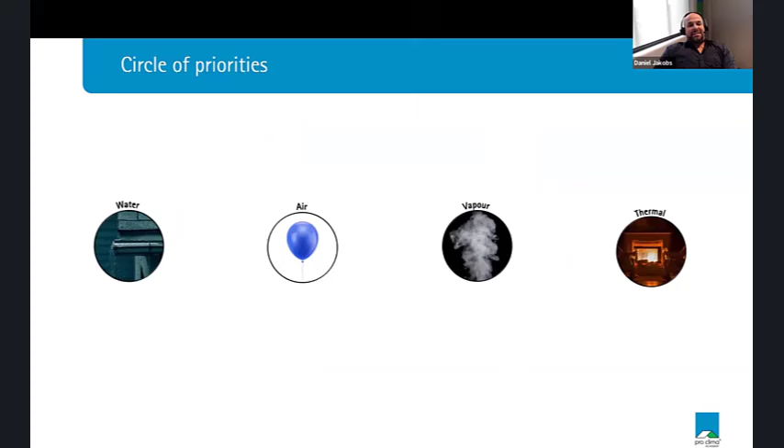And here's the reason why. If you ask me, what's with water? If you just look over the ditch to New Zealand, there's a nice book called The Rottenomics, and New Zealand still has to deal with massive problems of water leakage. So we know from New Zealand, and also in Australia, every time we have heavy rain, we have significant and massive water problems in our structures. That's why we have to deal with water first, because expensive parquetry and a nice kitchen are all worth nothing as long as our building is still leaking.

So that's why it's not acceptable. First of all, we have to get control of rain and water. Then we can talk about air.

But why do we talk about air first? Because I think energy efficiency is important. The building code is pushing for energy efficiency, and everyone is just, it's a big thing, isn't it? But we have to question what's actually generating energy efficiency, or why do we want it. We want to save energy, and we want to feel comfortable. But now we have to understand what makes us feel comfortable or uncomfortable.

I'm sitting here, behind me is a very drafty window. My hands are actually cold. I guess I'm used to it because I'm a chippy, but it's still uncomfortable. So what actually makes us feel uncomfortable, cold, is actually a draft on our skin, because the wind cools down the surface temperature of our skin.

So that makes us feel uncomfortable. So actually, the air draft makes us uncomfortable. And the best way to protect against it is to understand what's happening. Air movement is always energy loss.

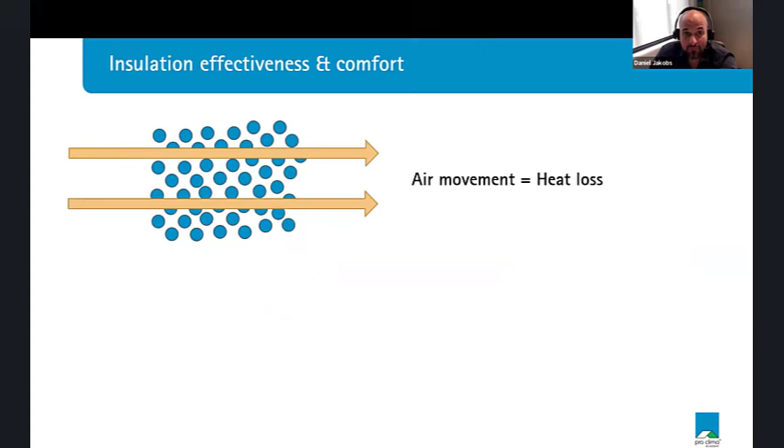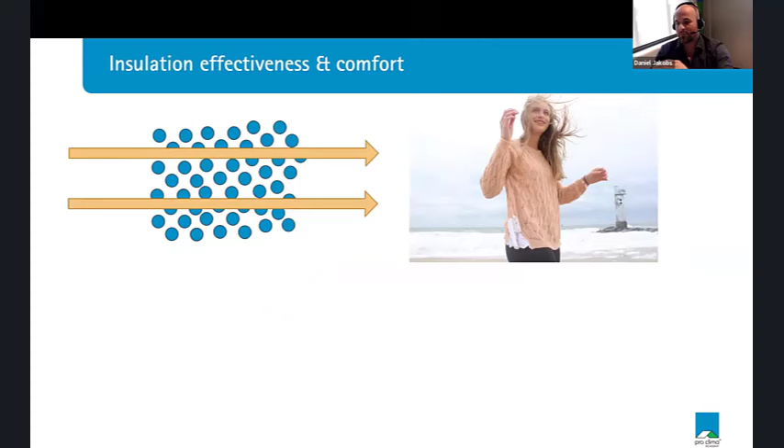Now let's compare it, if we wear a nice hand-woven jumper like this one, in the weather like we have today in Sydney, air will just get through the jumper and you're still going to feel cold. So that's why the only thing insulation actually does is trap air.

And the insulation manufacturers learned it at relatively early stages, because what they actually do is sell you 98% trapped air and 1 to 2% fibers. So it's actually smart to just sell you air and make money with it. But they understand that you have to trap air to actually have a good insulator.

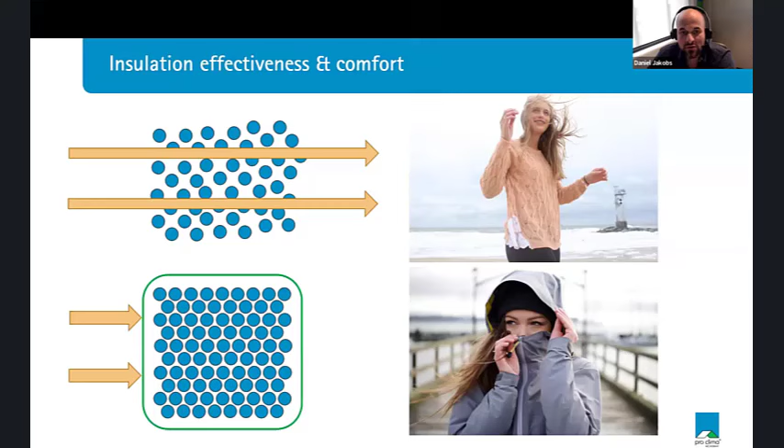So that's why we have to stop air movement in our structure. If you stop air movement, which we can measure with a blower door test, the tighter you build, the better it is. Stop air movement, then you stop removing heat to a certain amount. So roughly 70%, plus or minus, because there are studies around here in Australia, of energy efficiency is actually air tightness, not insulation.

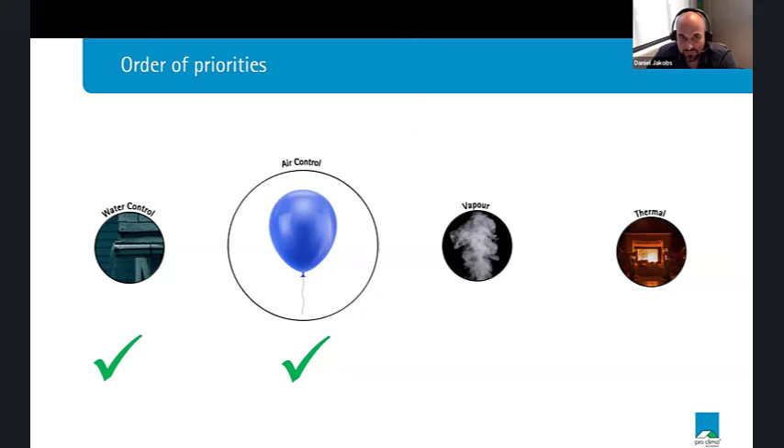So now we build airtight, but now we have a very important next topic, and this is about vapor. Because as we build airtight, we feel warm now, but we still produce moisture. We cook, we have a shower, we sweat. We produce moisture all the time, and it's free floating in the air. So what's happening with all the moisture?

As we know, as a family you produce around 200 liters a week of free floating moisture in the air. What's happening with all that? As we know, building airtight means it can't get away. Normally vapor always goes the way of least resistance. The first way was convection, and now that doesn't work anymore. So now it starts to try to travel through the structures, which is called diffusion. It means it starts to diffuse through the walls, in this case.

As plasterboard is highly vapor permeable, you can't consider that we have a lot of resistance in our structure. So it means we have to protect our structure from moisture traveling in with a smart vapor control layer, which we're going to talk about later. So now we trap the moisture inside, part two would be we need actually a ventilation concept.

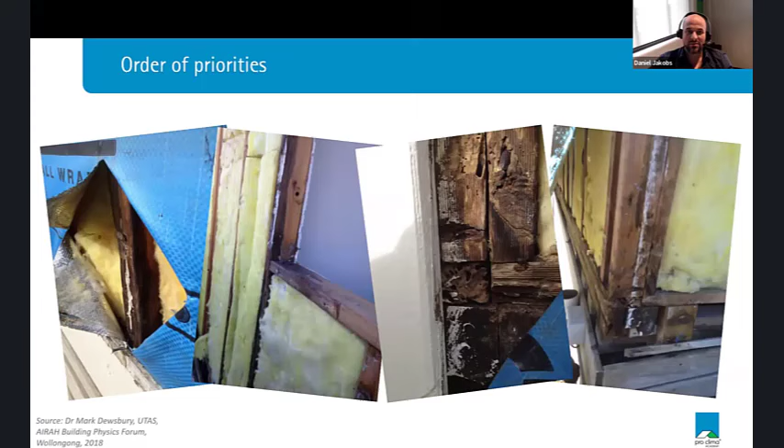The thing is, if you trap moisture - like here in Tassie, it's a pretty good picture - when we use good old aluminium foil, it's a perfect vapor barrier. Sitting in this case on the outside of the structure is a nightmare. This can happen after a few years. That's why you can't have vapor barriers on the outside of the structure, which we're going to talk about too.

Handling and understanding moisture means you have to understand different types of leaks. We have an energy leak, which in my opinion is most times when you have a thermal bridge. So if you have a steel structure or steel beams attached to the outside and the inside, you could create a cold surface on the inside. This is when you create something called a thermal bridge, pretty well known from the passive house movement. And you could have mold spots on your plasterboard on the inside.

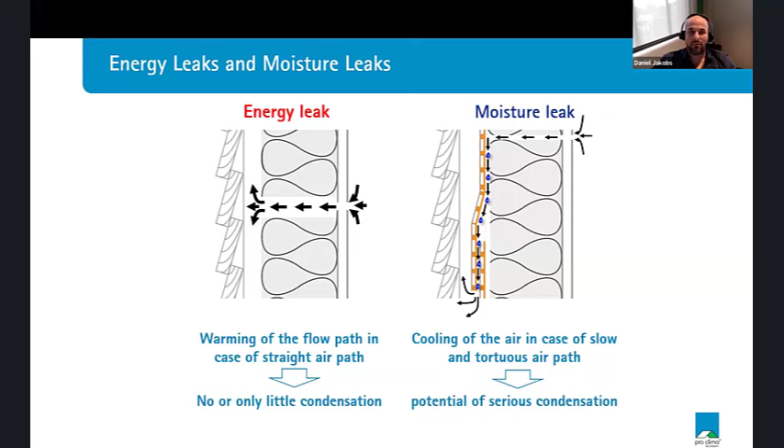A more tricky one is a moisture leak, which would actually be via convection again. It means you have a leak on one end, slowly the warm, moist air is traveling to the outside, and it will condensate on the way out. This would be a typical moisture leak because on some random spots you actually have mold, condensation, and rotten timbers. That's why I would always recommend understanding these two types.

So now I'd say we have a rough understanding of moisture too, and thermal. So what's happening with thermal now? And the answer is quite easy: if you actually control water, air, and vapor, thermal comes as a bonus. So now you can put in as much insulation as possible and you can't stuff up the system anymore. The reason I'm really so clear on it is because in most parts of the world, specifically Germany in the 1980s, 90s, we pushed on thermal.

There's a study, an Australia-based study on moisture management and condensation, which we're going to show you later on - they're actually focusing just on that one. It means we all had these problems because the more insulation you put in the structure, the higher the temperature difference between the inside and outside, the higher the moisture drive, and the higher the potential damage to your structure. That's why we have to get water, air, and vapor right first, and then we can have thermal as a positive side effect.

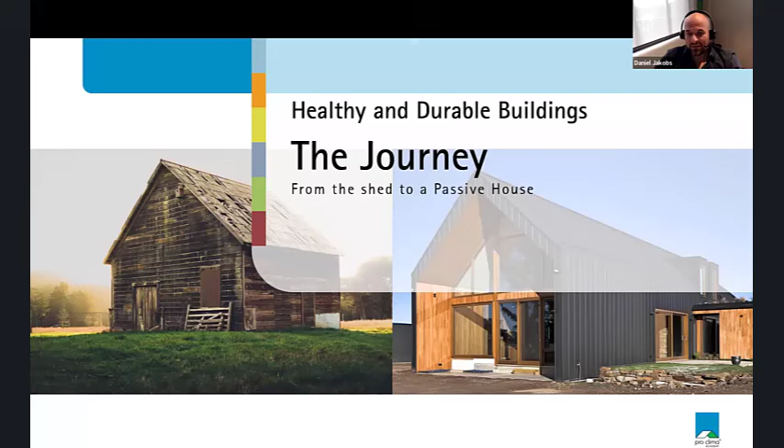We want to live somewhere like here on the right, which is a passive house - at the moment the highest building standard internationally we have so far. So let's get on the way. First of all, we have to leave the past behind.

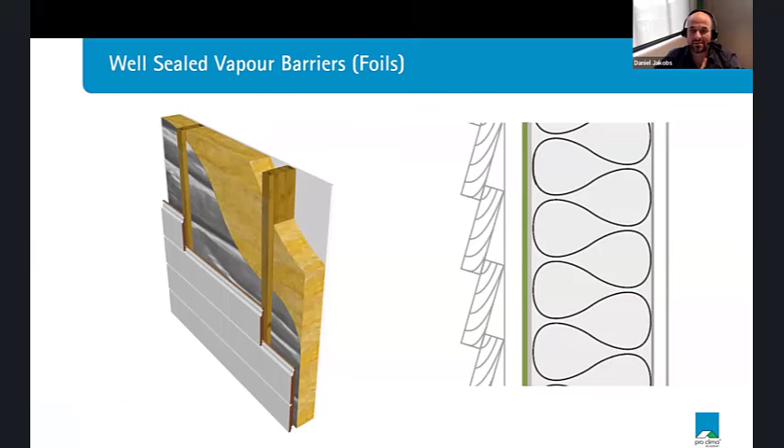This is the good old aluminium foil. We still see heaps on building sites, which, by the way, in most of the climate zones in Melbourne and Sydney is actually illegal because aluminium foil is a perfect vapor blocker. What it does is you have internal moisture traveling through your structure to the outside, and it's going to hit the cold surface of the aluminium foil - you get condensation. Why? A good example: if you wrap your fish on the barbie in aluminium foil, it keeps the moisture in, isn't it?

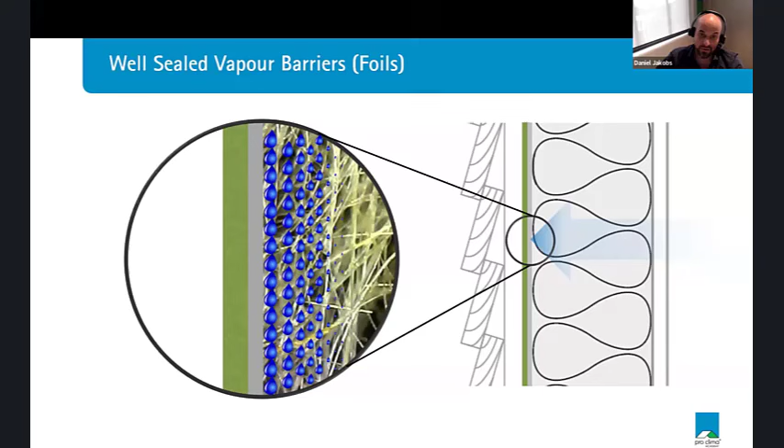So that's what you want - that's the purpose of an aluminium foil. If you do the same to your house, you actually wrap the moisture in your house - you keep it in, so you don't have any drying potential. That's why the building code says in climate zones 4 to 8 now, you have to use a class 4 vapor permeable membrane on the outside. Perfect - what you see here: class 4, cladding on top.

That's, by the way, code compliance at the moment. And you already can hear my sarcasm.

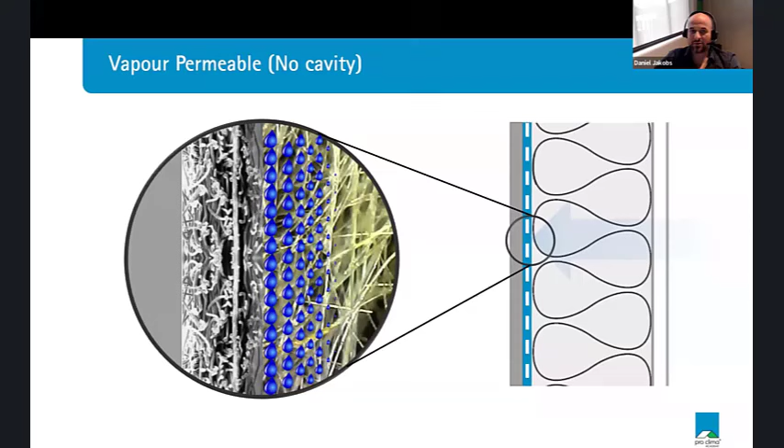You still have condensation because it doesn't help you if you have something not vapor permeable on top of something vapor permeable. You still trap moisture. Still the same issue. The quick answer here is you just separate the two layers.

So now you actually have internal moisture traveling through, which is a typical cold climate condition. It's traveling from the inside to the outside. As you separate these two layers, now your structure is actually allowed to dry. Now the moisture can escape and you can ventilate it out. And if you have condensation, because you might hit a metal cladding, now it can drain down. So we call this a drained and ventilated facade system.

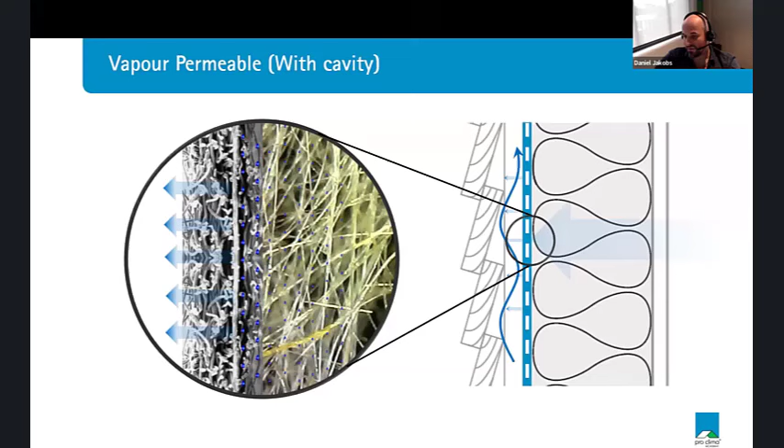There's still a risk because if you introduce too much moisture in a structure in certain climates, you still might have the problem that your structure can't dry out fast enough. So you still need a smart vapor control layer on the inside to stop moisture getting in your structure. But you still, if you have moisture in your structure, you have the maximum drying potential to the outside.

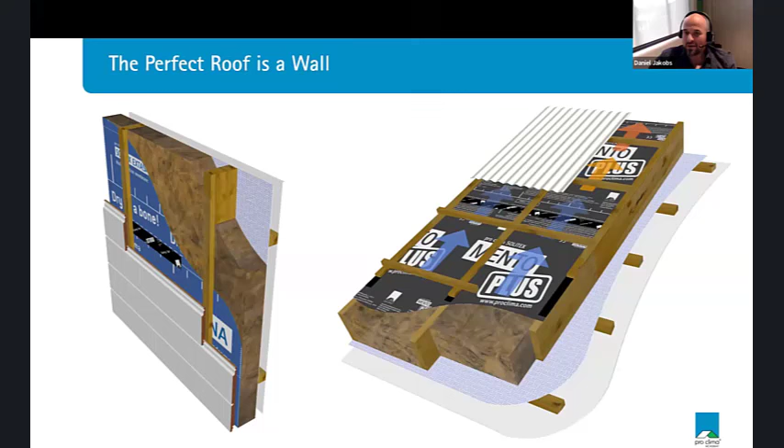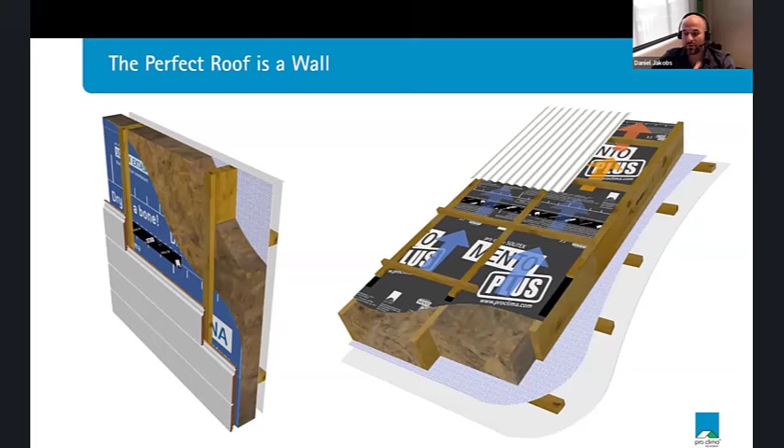Another positive side effect: because you created a ventilation layer on your roof, and don't use these anti-con blankets, you actually create a chimney effect also. So as you create an airflow in your roof structure, you remove heat in summer, which has a pretty good effect in both directions.

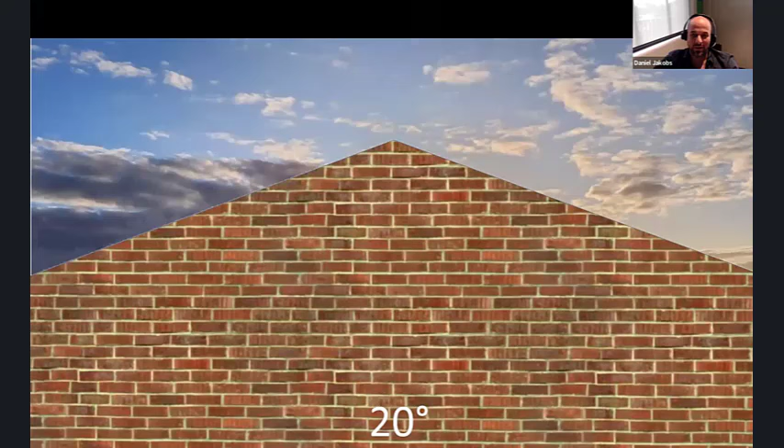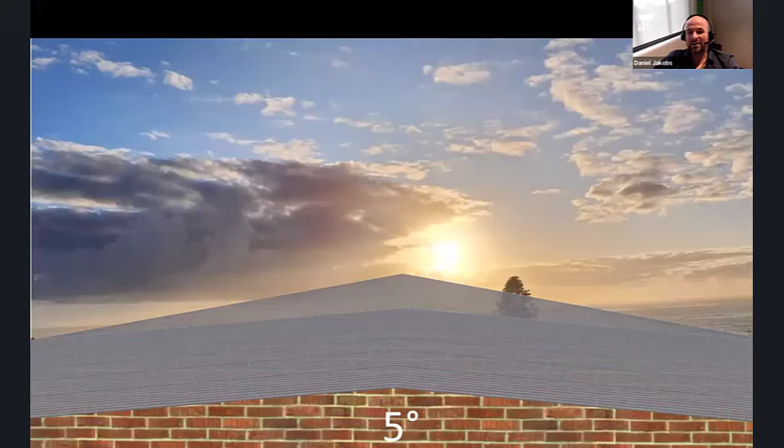So now the big gambling and negotiation will start. We try to fight for each single degree on your roof because you want to get it down. And now it makes sense why we actually want to go down to 2 degrees, because at least you have something left from the ocean view, isn't it? So there's a reason, because we have height restrictions, specifically when we live in dense areas, not outside of big cities, and we want to have the views.

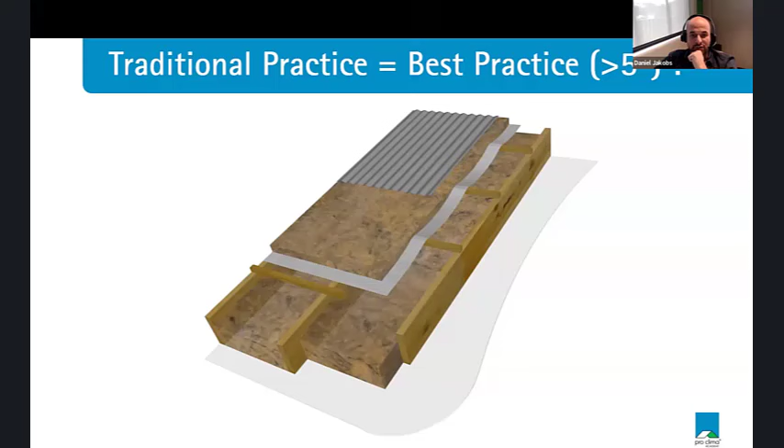So what's the difference here? If you go back to the building physics perspective, that's best practice in a traditional way: you just put the anti-con over and hope for the best, with a ventilation layer below. We specifically at pro clima are pretty precise with our recommendations.

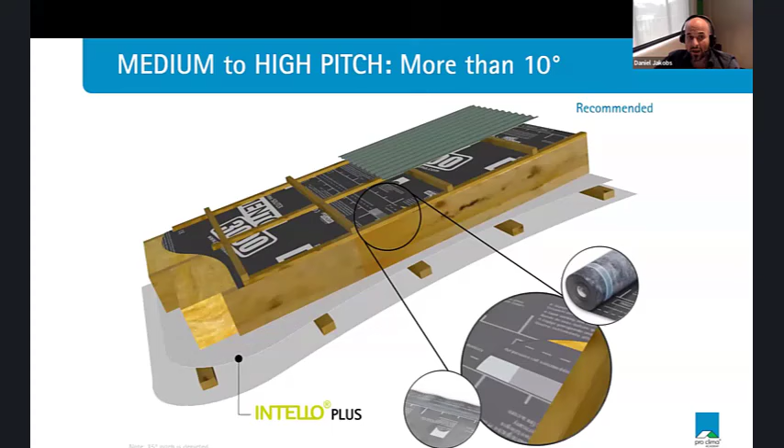So we say, if you're above 10 degrees, you can use flexible membranes right over the rafters, unsupported. If you're 5 to 10 degrees, then you should always use a board, because the biggest issue is membranes always sag a little bit. So you can have ponding water on your roof. You all agree having a pool on the roof is not a great idea. We always want to avoid it at all costs. So that's why you put a board on, put the membrane on top to stop sagging of the membrane.

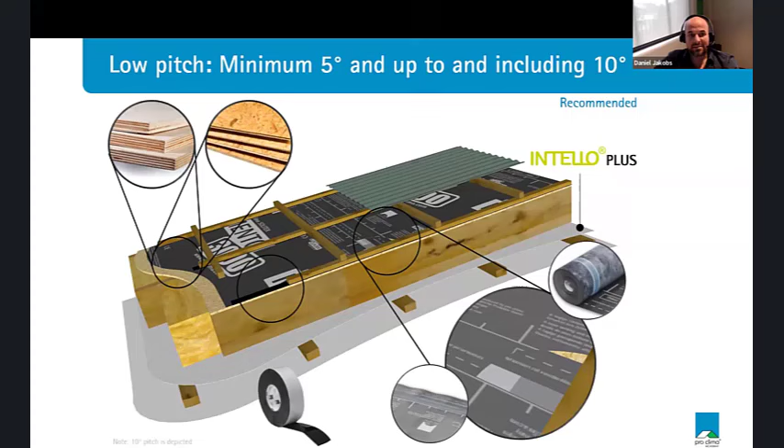And using certain accessory products like the nail penetration tape, and maybe a membrane with an integrated tape, which performs significantly better than other membranes, is definitely a big recommendation here. If you're above 10 degrees, same again—I don't even know why I have this slide in, because it's a double up. Sorry for that.

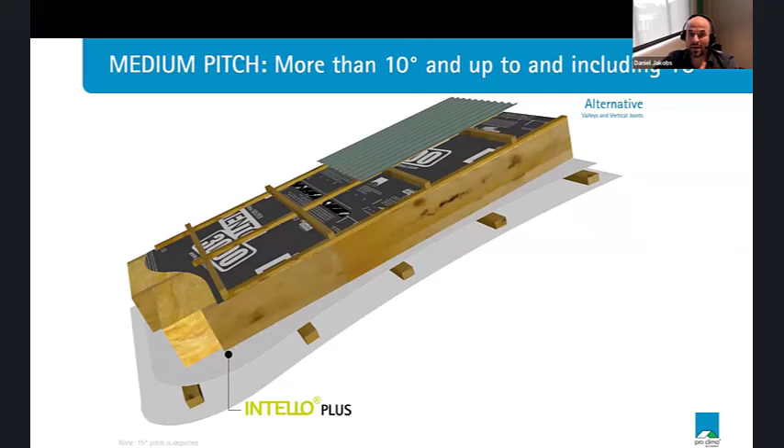We want to understand where we're actually coming from. Having the anti-con system or roof blankets on 2 degree pitch is still code compliant, which is a big issue, because you get a water pool, and as you see here, you don't have a drainage layer.

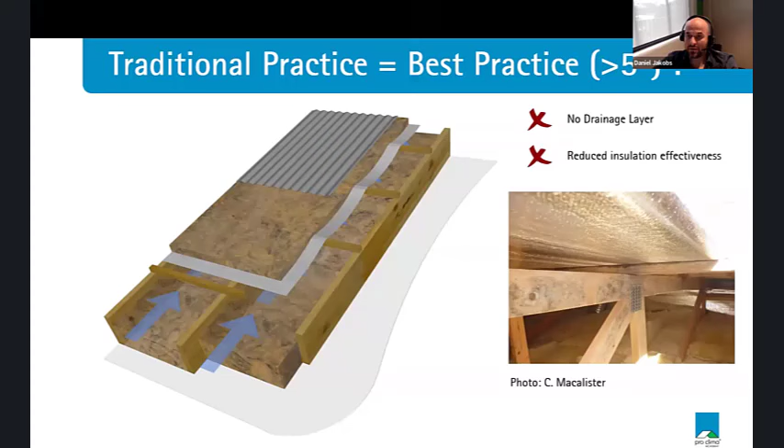As you can see here on the right picture from Tasmania, you can trap a lot of moisture even if you ventilate it, because you still create a cold surface on the inside of your roof structure. That's a good reason why in Tassie you barely see any aluminium foils, even if it's still legal. So let's retrofit or deconstruct the structure.

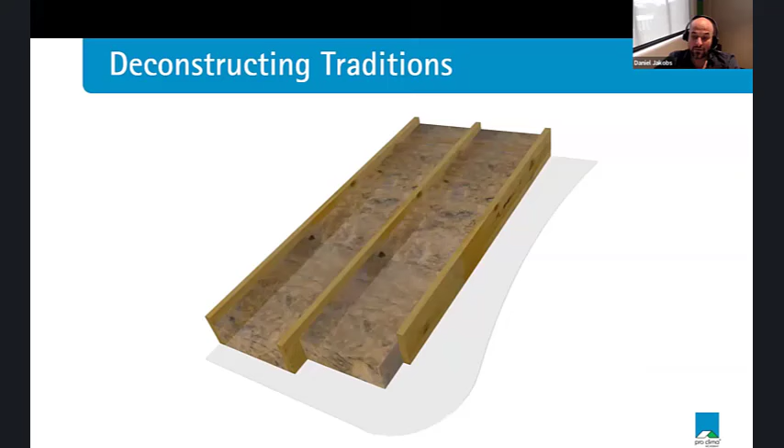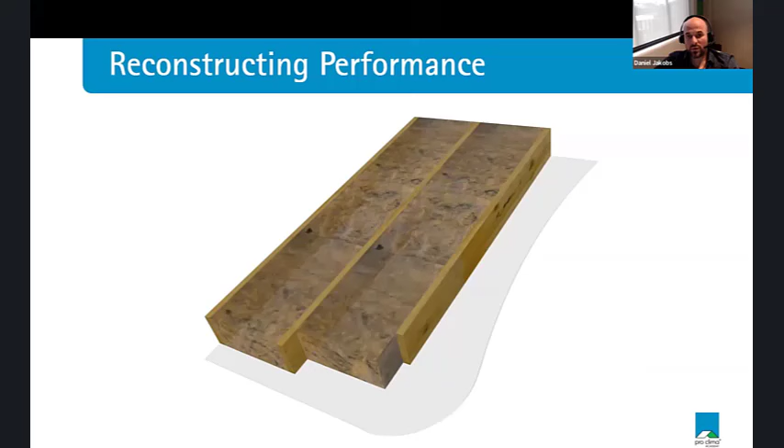We just remove layer by layer. The first thing we do is fill up the rafters completely with insulation, because you don't want an insulation gap, since you get wind washing, which we'll talk about in a second. You directly attach the membrane and tape the overlaps, because you don't want any wind getting into your insulation.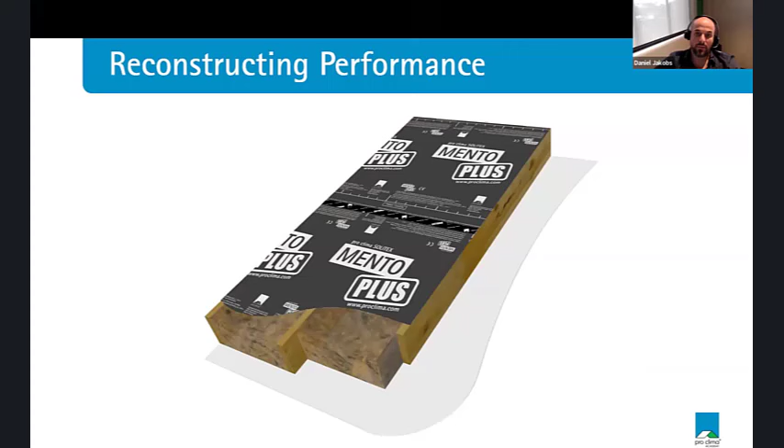That reduces the performance of your insulation. You put counterbattens on, in the best case with a Naideck tape, which is kind of a nail penetration tape, then for low roof pitch, purlins and roof cladding go on, and it's easy going.

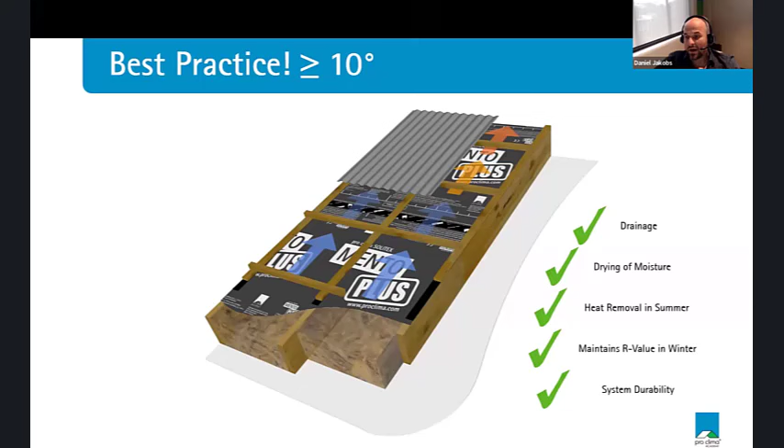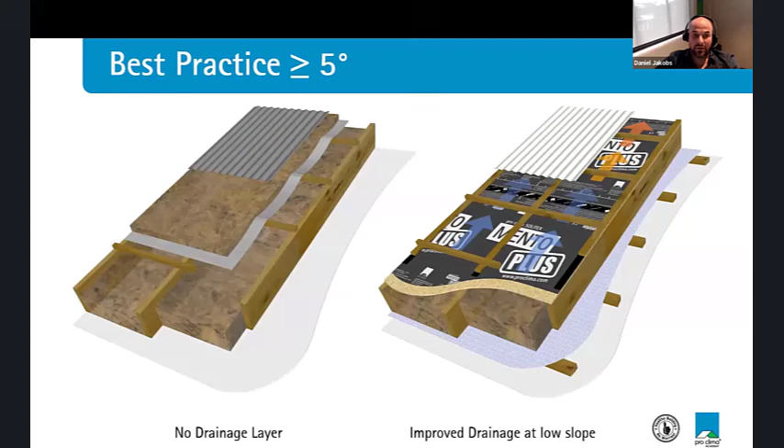As I said, you remove moisture in winter and heat in summer. So now you can tick all the boxes for summer and winter conditions, because you have the perfect roof cassette. If you have no drainage layer properly on the left side, you will trap moisture, which definitely reduces the performance of your structure over a long period of time.

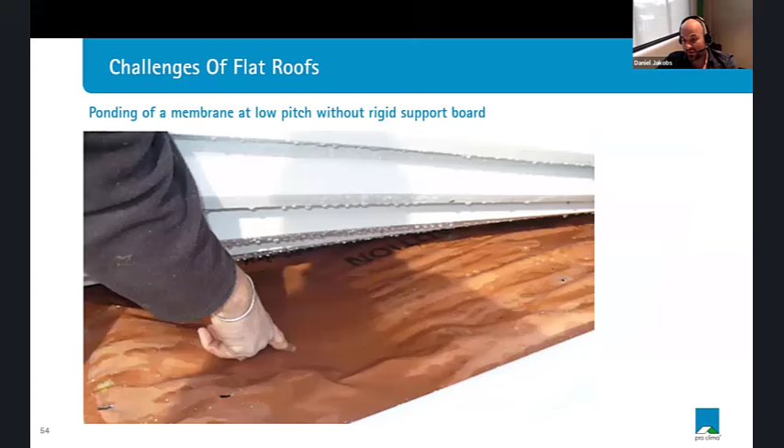But what are the challenges? The reason for issues with flat roofs is actually ponding. Whenever you install membranes on low pitch roofs, you can install it as perfect as you want. I consider myself a pretty half decent chippy, and I've worked with these membranes for quite a while, so my installations are pretty neat. Even with a perfect install like here, membranes will always sag a little bit because they relax under heat, which is quite normal, which is actually a good thing.

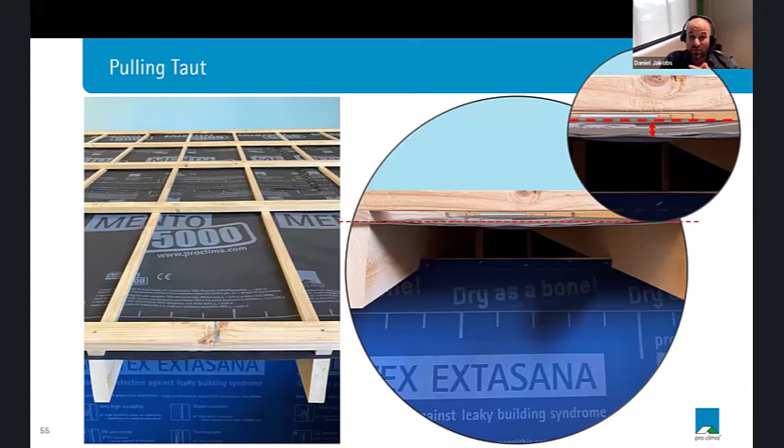If membranes would actually tighten up under heat, you'd create a lot of stress on the tapes and on the fixings. So this sagging is what you want.

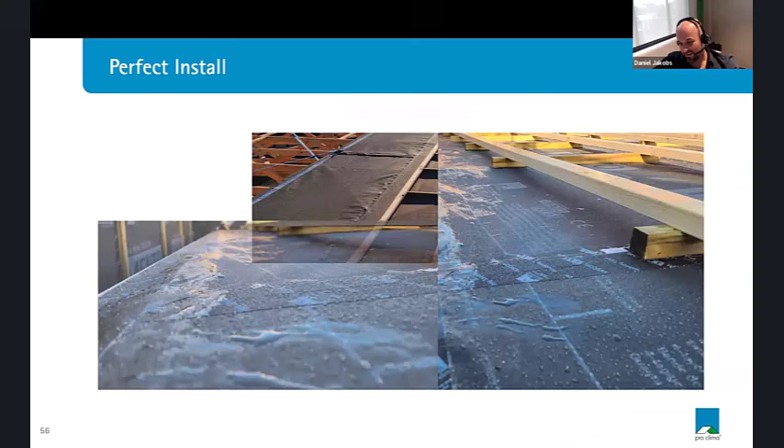Even this building site is a perfect install. You see it's nice and taut, it's shiny, it's just beautiful, but it's 1.5 degree roof pitch. So it looks great, and you might be confident it won't leak. Then just the day after, that's exactly the same roof under 1.5 degree roof pitch.

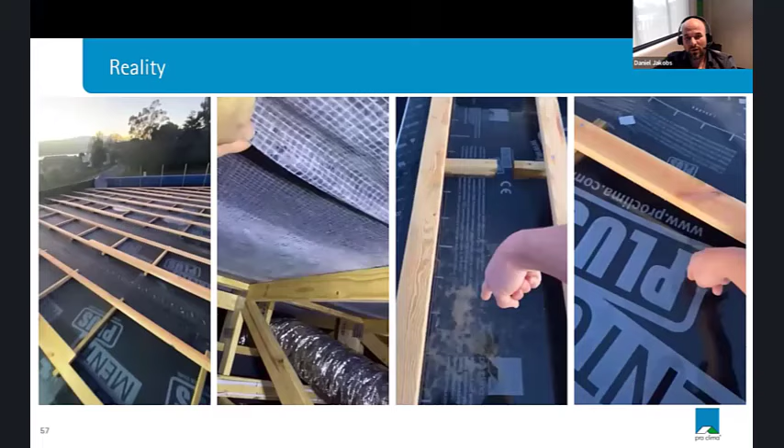So even the best products on the market won't help you. You still have water pools on the roof, water wicking through the fleece via capillary action. We all agree that's not a good outcome. This can actually happen just based on condensation underneath your roof too. So we all agree it's not how it works, or what we would sign off on.

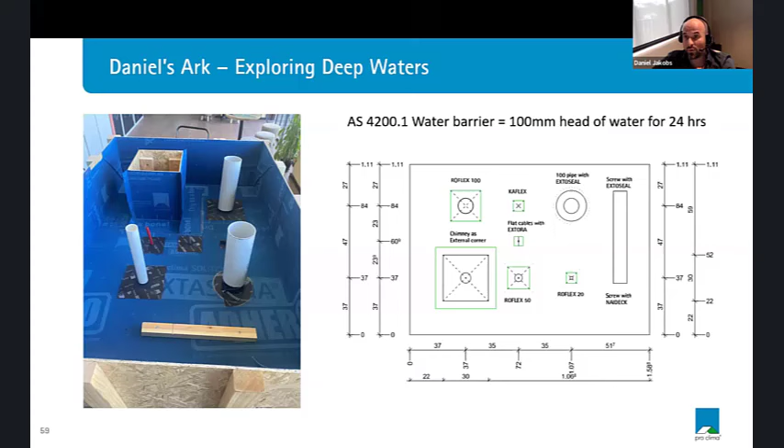Before figuring out where the problems are, I really wanted to understand them. To be code compliant for membranes, you have to hold 100 millimeters of water for 24 hours, which equals 1 kilopascal. To be honest, when I was building this box back during COVID, I was pretty confident.

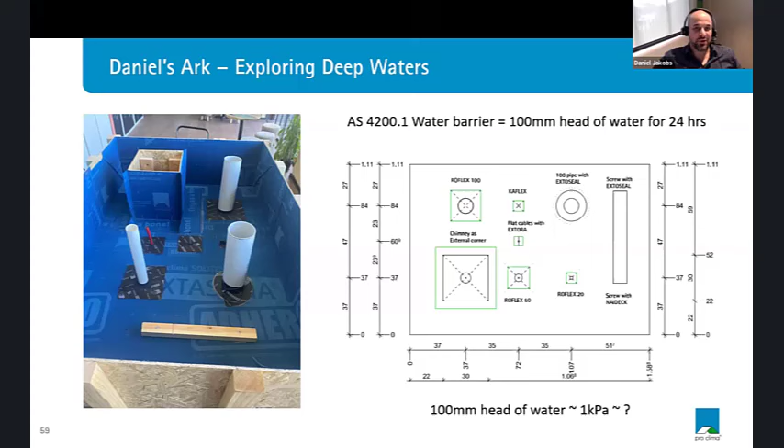I thought, easy, I know exactly what's happening and I know it all, I'm smart, and I just started it. I came up with all sorts of funky ideas, some pretty basic, and it was leaking. So there was a first kickback, and actually I wasn't as smart as I thought.

So I had to change my detail, and I used a specific stretchy tape to actually seal it around. Then for the chimney, I already came up with a super fancy origami taping technique for how to tape around chimneys, because I wanted to avoid other products. And I thought, oh, it must work for sure.

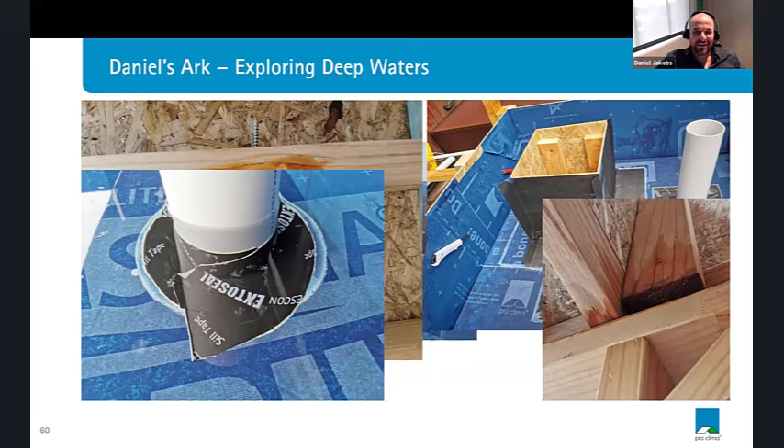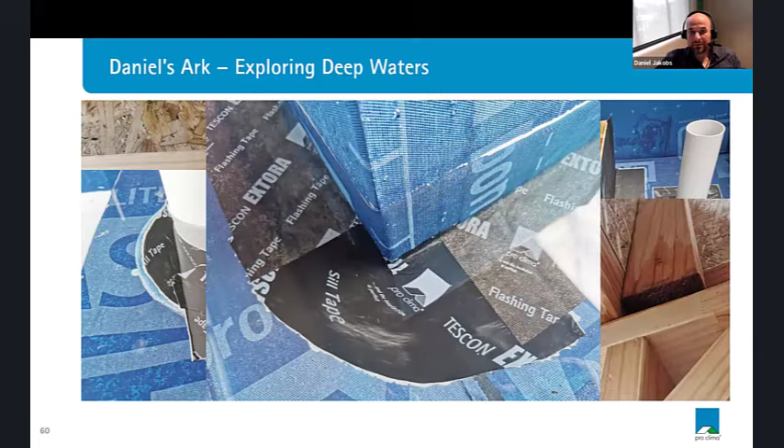And 3 or 4 corners leak too. So another big learning for me, I had to change it again. I went back to a stretchy tape because I realized having the right products for the right applications in the end is faster and cheaper. And this is how it went all the way through, and this is how I came up with the flat Adhero system.

We're pretty precise how things are working, and as always, we have to think of it as a system. It doesn't matter if you talk about our pro clima products or other competitor products, we always think about systems, not products. It's very important, and also important to understand how a structure is working.

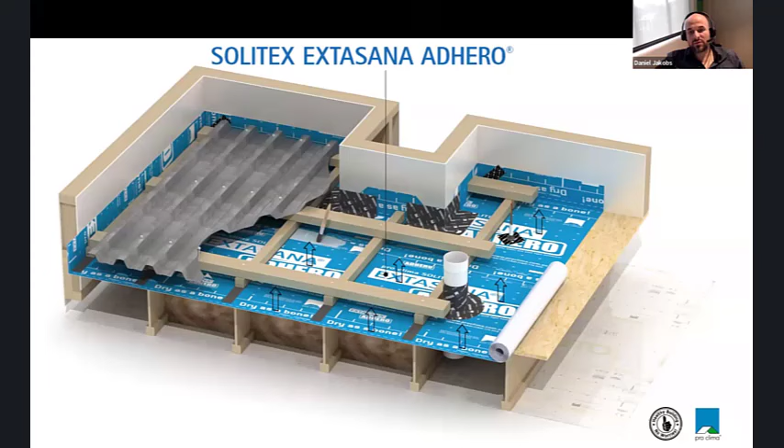So it means the roof structure, we always try to create the highest drying potential for this roof structure. That's why you always recommend having a smart vapor controller on the inside to stop internal moisture getting into our structure, and we want to have the highest drying potential to the outside too. We also have to understand that building materials are never 100% dry.

My experience here in Australia is quite often the opposite. Sometimes it feels like we're trying to introduce as much moisture into the structure before we cover it up with membranes. So the important part is we have to keep our structure dry over the whole period of time.

When you have a standing seam, it's kind of a tricky one. In this buildup, you really always have to have a separation layer. You can't have standing seam directly on the membrane, because otherwise you have a cold surface hard against the membrane, and you'll pretty surely end up with a soggy board. That's why this separation mesh, even if it's just 8 millimeters, allows a drainage layer for the standing seam or flat metal roof.

Very important to say, this is not a ventilation layer. This is just a pure drainage layer and separation layer. And this system has to work with a smart vapor control layer only, because there's nothing else which can actually make it work.

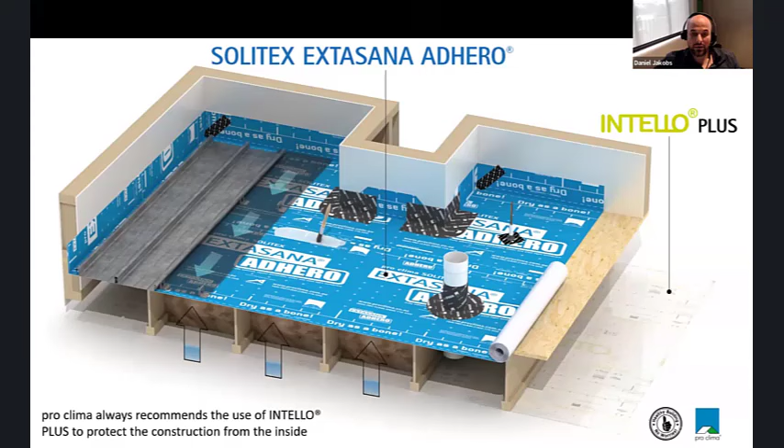Also, as this will never be a deemed-to-satisfy solution, you have to do WUFI calcs, and the color of the roof will matter. In quite a few climates and orientations, you actually have to go with a dark colored roof, because I know the market is driving towards white colored roofs, since we don't want overheating of our roof structure.

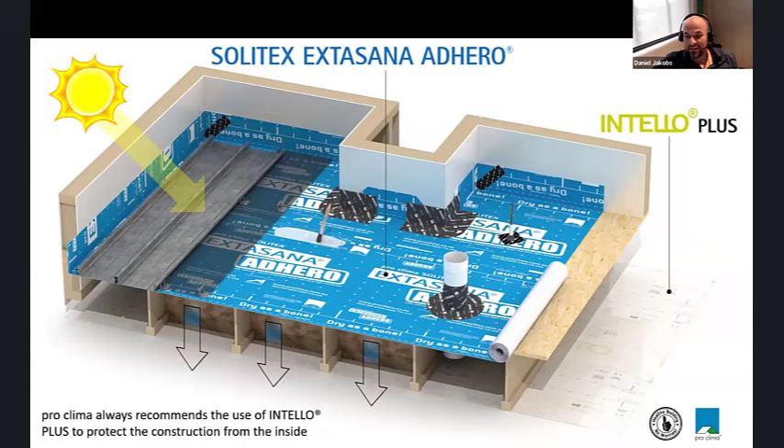But if you have a white colored roof, you might not have enough energy to allow your moisture to drive back, because in summer, when sun hits the roof sheets, it actually creates a reverse moisture drive. Now your structure can dry out to the inside, because we have this magic smart vapor control layer in here. Same with materials, they can also dry out to the inside.

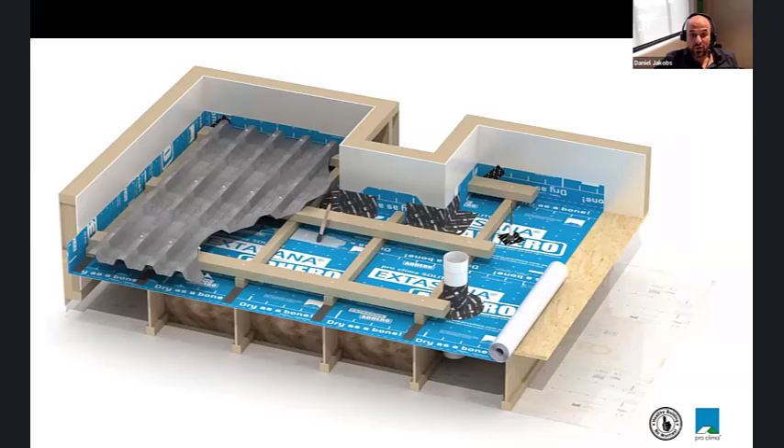Very important is, the better case is always if you can separate your roof sheeting from the membrane, as you can see here, and create a proper drained and ventilated roof structure. The thing is, as we have a very, very low roof pitch, we have something like a stagnant effect, so we don't have a proper ventilation layer anymore.

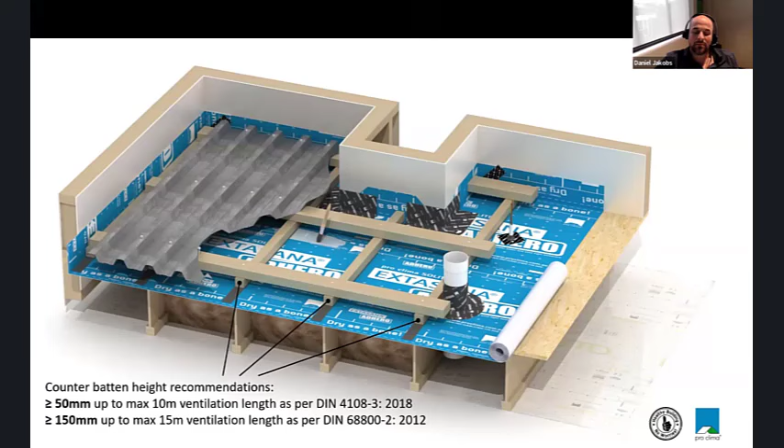And that's why the ventilation height needs to get more and more. So we say, if the roof is up to 10 meters, you should have a minimum 50 millimeter ventilation layer. If the roof is longer than 10 meters, you should actually have 150 millimeters of ventilation. I know no one will do it, but it's very important to mention, because international studies from Germany, from Lund University, from the US show that ventilation is very important to actually get rid of moisture. These are based on the German standards. I know it will take a while before we implement them, but I think it's very important to understand the risk of moisture in our roof cavity.

We have quite a few technical articles regarding this topic, called Above Sheathing Ventilation. You can download all the technical articles on the pro clima website.

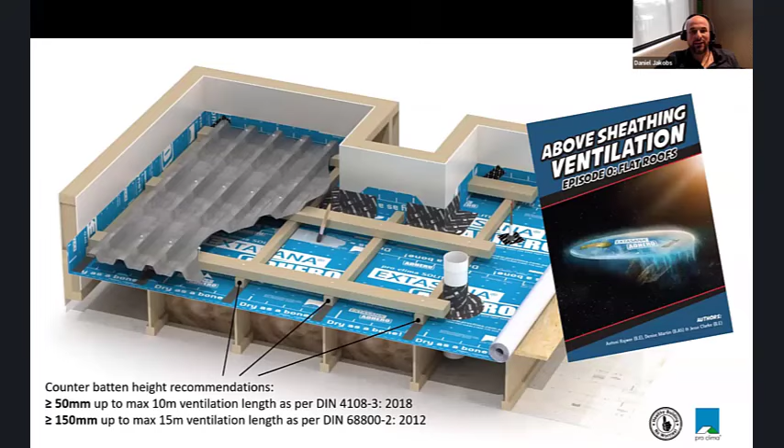It's nice to talk about all the theory and have nice thoughts. And when I got you right, I think we have quite a few architects here today, isn't it? So what's our biggest concern?

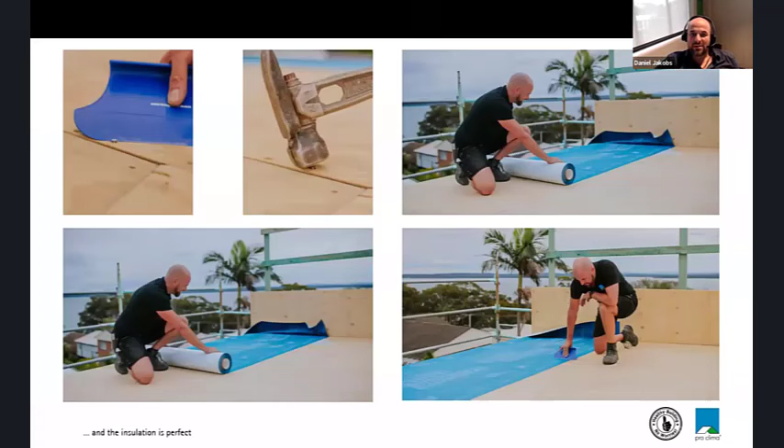A little one, you see the nail is sticking out, you have to hammer the nail in, because if you have the nail sticking out and you walk over it, you're going to pierce the membrane and have a leak again. So you spend a bit more money to have a better system, but it won't work anymore.

Install it properly, nice and taut, don't have any wrinkles, because if you have wrinkles and overlap, you can channel water back again. Using the primer here to stop capillary action is something I came up with, because you really want to stop water slowly moving upwards against gravity, thanks to wind pressure.

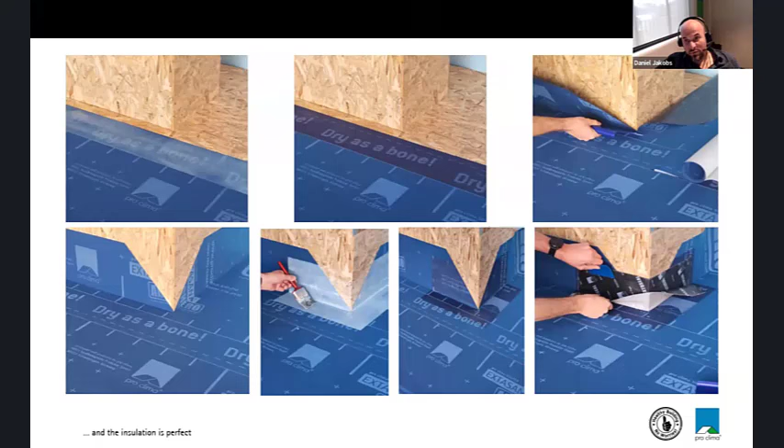Corners and details and bits and pieces. It's very important to use the primer again. You nicely fold it into the corners, prime the overlaps, and use the stretchy tape around the corners, because this actually really brings a pretty perfect outcome.

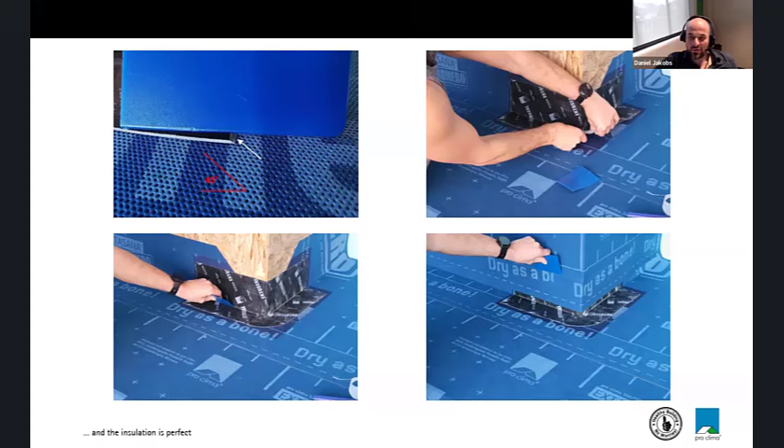The idea is why I'm so precise, because if you just follow the steps, it's going to always work based on my experience. So whoever is installing it, if you follow these steps, it's a pretty safe system to use.

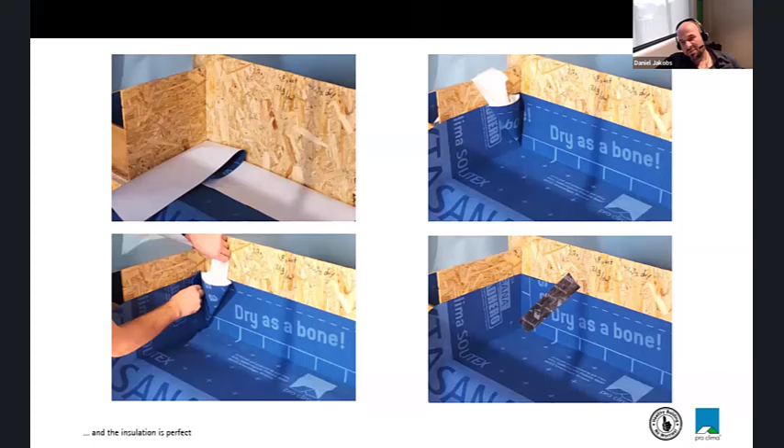The same was true with internal corners. I actually prefer not to tape internal corners. Watch some Japanese origami videos, and then you see you can just fold it inside and it looks quite perfect, because I didn't cut on the internal corner, as you can see here. Every time when you cut, you introduce another risk, and this is what we're trying to avoid here.

Same with pipe penetrations, you just prime around, use the stretchy tape, and work yourself all the way around the pipe. It's pretty easy. It looks more complicated than it is. So it was actually a pretty easy detail.

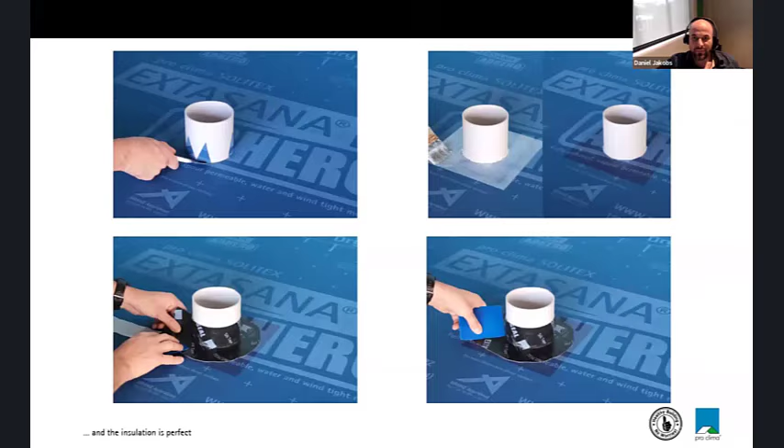Also with cables, cables are tricky because in Australia we have flat cables, while most of the world has round cables. Round cables, we have grommets and they seal really, really well. With flat cables in this case, it's always difficult. I have some taping techniques for how you can tape it, but as you can see, there are little corrugations, and it's nearly impossible to push the cable properly into the corrugations.

So I use a conduit or pipe offcuts with a grommet, because we know the grommets seal really, really well. Run the pipe through, run the cable through, and at the end, when you finish, just seal it up. And then it's a perfect seal. Also, in my opinion, we shouldn't run cables while we run membranes and try to seal the structure, so it's actually much easier because you just do it afterwards.

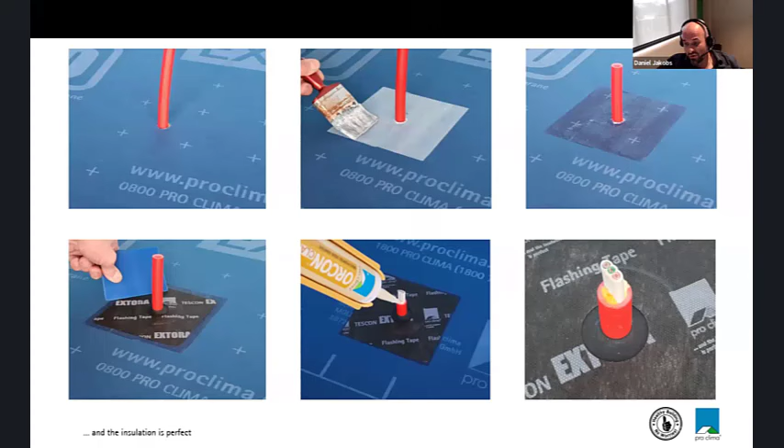Would you agree? I would say yes, specifically with data cables, because if you break like a 50-meter data cable because they just wanted to run it in the beginning, it's a pretty expensive exercise.

And we talked about the roof pitches before, so whatever is below 10 degrees, you can have water wicking through the screw penetration. We know this is happening because I've seen it in Australia, and it's been a code requirement in Germany for around 15 years for all roof pitches. In Australia we just say below 10 degrees. That's why you have to use something like a butyl tape, a nail penetration sealant tape.

So what you do is put it underneath the screw, because there's so much glue and it's so sticky that when you drill through the glue, the screw pulls the glue into the hole and seals it from the inside. It works really, really well, and it's well established on the commercial market already.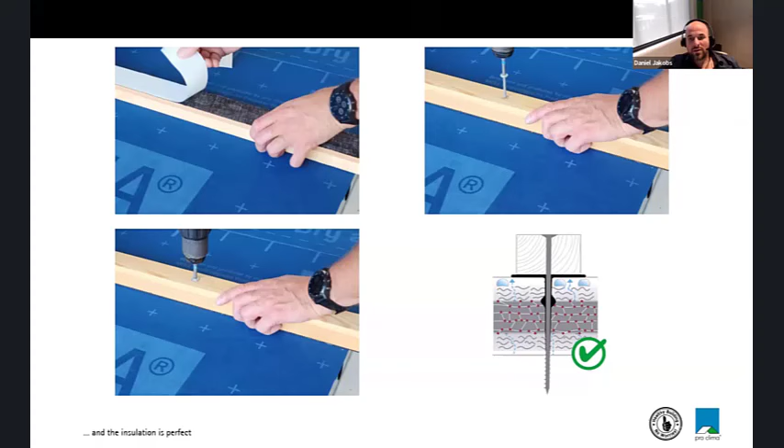Last but not least, most likely the only way you can make this system work is with a smart vapor control layer on the inside, like our Intello here. So as we said, the smart vapor control layer, and of course now I'll talk specifically about our product, is relatively new on the Australian market. We're of course not the only one selling these kinds of products, even knowing the differences in the products, but that's not part of the topic today.

So why are we using the Intello smart vapor control layer? I always say treat your wall like a fancy exclusive club, like the Berghain Club here in Berlin.

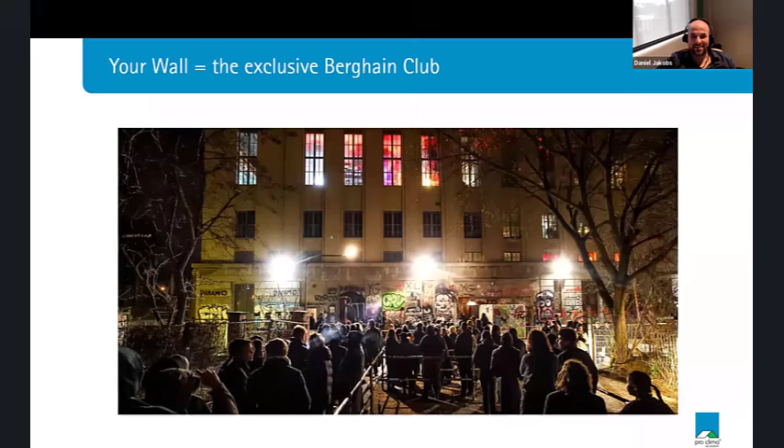I'm pretty sure everyone heard about the Berghain, and everyone wants to go there because it's the world's most famous club. We all know that this club has the hardest bouncer in the world, and it's actually quite difficult to get in. That's exactly what our smart vapor controller is doing in Intello.

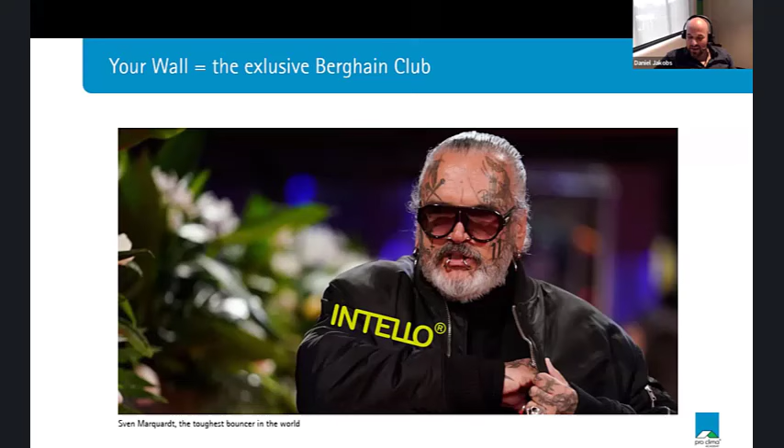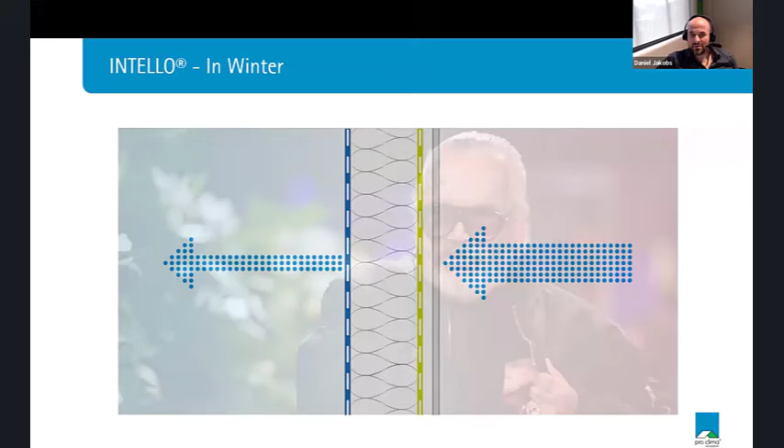Intello stops moisture getting into your structure and keeps all the nasty moisture out. It's pretty vapor tight in normal conditions, so it barely lets any moisture into your structure. Back then, we could just use a polyethylene sheet, like a plastic foil, and you just block the moisture getting into your structure. This is what we did in the past.

So back then, we just used something like a PE sheet to stop moisture getting in. The problem is, if you remember the aluminium foil picture before, exactly the same is happening now on the inside.

Because what's happening in summer is we have high humidity on the outside, and specifically when we talk about Sydney, where we have 80% humidity over a very long period of time, even months, you have a lot of back diffusion. You have external moisture trying to get to the inside of the structure. So if you have a PE sheet on the inside, you just block the moisture and you actually get mould and rotten timber on the inside of the structure. We had even these problems back in Germany.

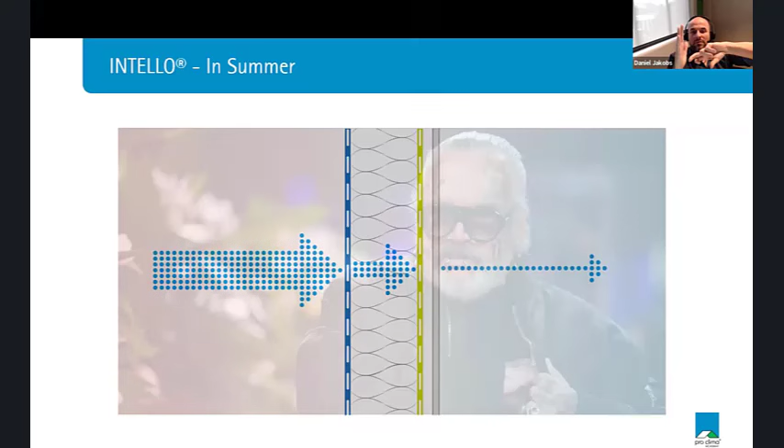That's why we need a certain drying potential. So it's not a vapor blocker, it's what you heard me saying quite a few times today - it's a smart vapor control layer. It's vapor tight in winter conditions when internal moisture is trying to get into your structure, but in summer when you have back diffusion, it actually allows moisture which is trapped in your cavity to escape to the inside. How does that work? How is that possible?

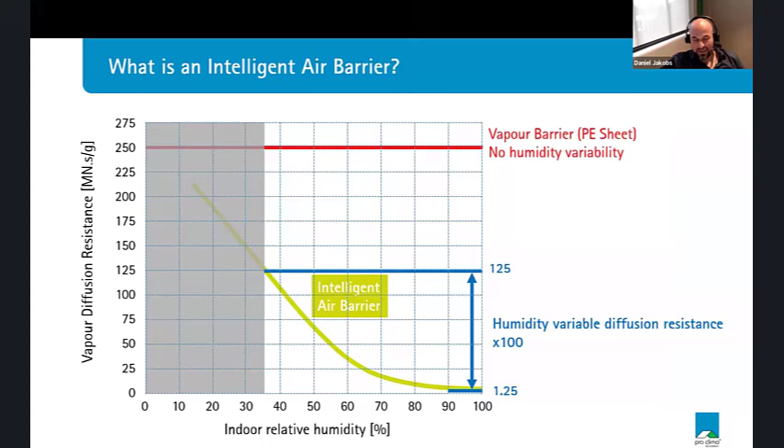The long story short is we have a variable diffusion curve. As the PE sheet, polyethylene sheet, is absolutely tight and constant, the Intello changes its properties based on the humidity level on the backside, because there's a fleece. The fleece will absorb the moisture, and then you have a moisture-loving material - the fibers get longer and it releases the moisture to the inside. What's quite unique with our products is that you have 100 times difference in humidity variable diffusion resistance, meaning it can get very, very vapor open, but in normal conditions it's pretty vapor tight. The big difference between manufacturers is how the curve looks, and that curve is derived by the makeup of the sheet and the differences in the lengths of the fibers at a very small scale.

Sorry, again? I'm trying to get my head around exactly how, mechanically, this can change with temperature and humidity - it just sounds very interesting to me that a material can do that.

Temperature is also the driver for moisture, because we create pressure differences between one side of the structure and the other. The basics of building physics is that high goes to low - high temperature goes to low temperature, and high humidity goes to low humidity. So the vapor pressure is the driver, and the moisture content reacts because the fiber of our membrane reacts to the moisture content. As the fiber lengthens, it opens up the structure, and this is why it allows more moisture to go through. That's fascinating, thank you.

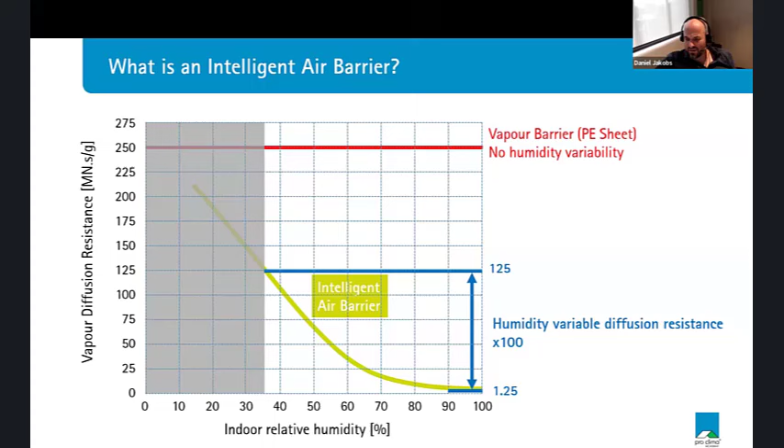So the thing is, when we have mold in our structure, it's already too late, isn't it? So the idea is when we plan a building, when we build a building, we try to avoid all these problems because we want to get it right from the beginning. That's why the building code now has a specific guideline you can use for commercial or residential, because you have to deem to satisfy. And whenever you build not to deem to satisfy, you can follow the verification method from the building code.

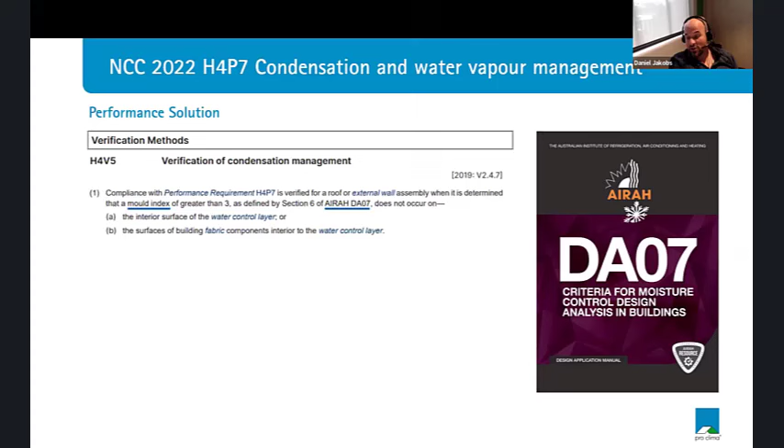And what it does is you use WUFI, that's a hydrothermal analysis program, and you put in all your wall buildups, and it actually calculates over a 10-year period if you want, with the real climate data and real material data from the Fraunhofer Institute back in Germany, what the condensation risk of your structure is going to be. And that's quite interesting - it means we don't have to guess anymore how the structure and buildup is going to be. Now we can clearly calculate it.

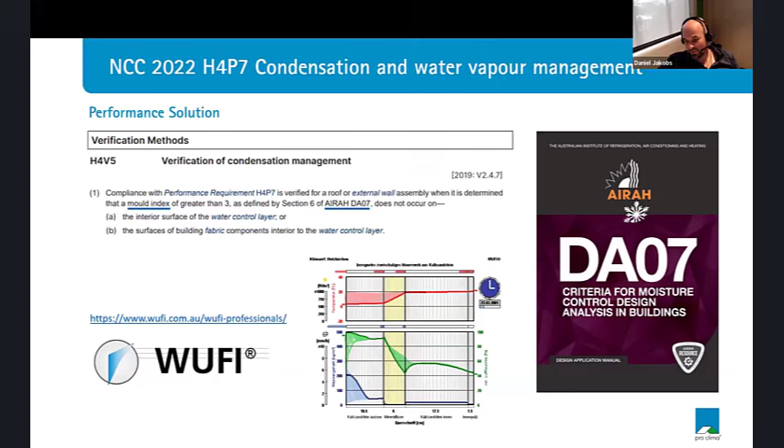And as you remember, we went to the World Conference of Timber Engineering last week, and there was one presentation about a girl who built a CLT building in Melbourne. She actually did WUFI calculations and put sensors in the structure, and the sensors showed the exact same, or nearly the exact same, outcome as the WUFI calculation. So you see more and more people proving that it's working, even on the other side of the world. And the Fraunhofer Institute was actually working for over 30 plus years to get this right, and it's part of the building code now, which is a good part.

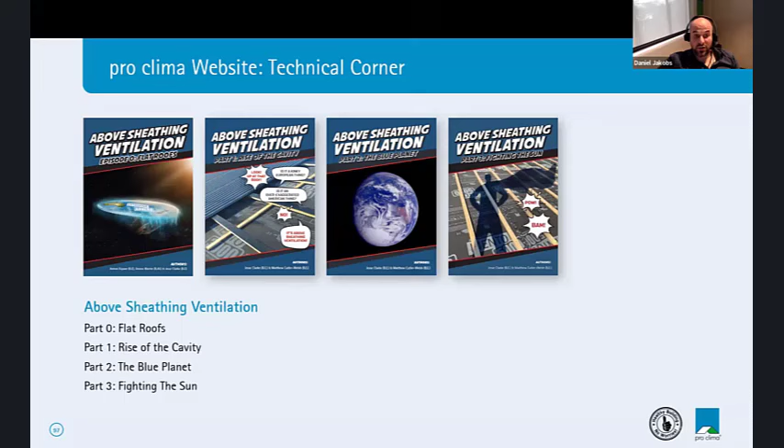As I could talk for ages about building physics, we have heaps of technical articles specifically about above-sheathing ventilation, which you can download for free on our website. One of my workmates wrote something like a masterpiece, an Australian-based study on air tightness and moisture management. You can also download that. Kylan is already reading through it, and I think it definitely helps everyone get a good understanding about the different climate zones and the building physics behind our structures, etc.

And this will be it for me. Even though it just doubled the size of my presentation, I still went a bit too fast. But I'm pretty sure we have heaps of questions.

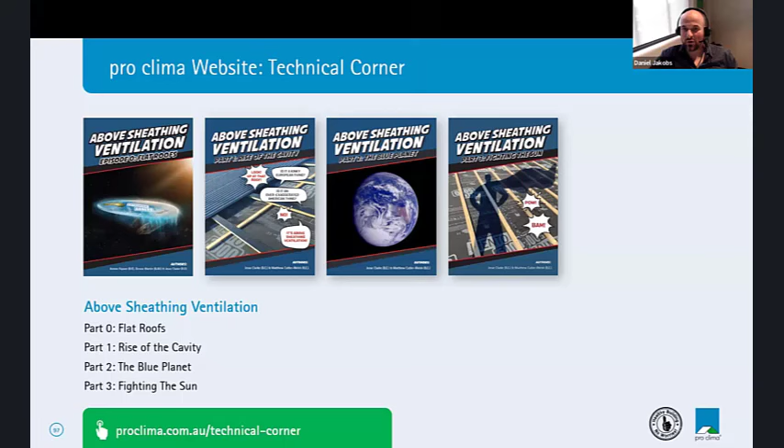On the ridge cap, there are different solutions. There's something called a venter roof. We have two details on our website showing where you could fold the mesh around. It's difficult because these are details I'd normally draw up now, but as we're on screen it's a bit difficult to draw that one up. So have a look on the website at the details - we have quite a few details on it.

Fantastic, lots of homework everybody. Paul Davies asked again, is the purpose of the battens inside the vapor layer solely for running services? Yes, not purely, but yes.

So the idea is when you invest the extra time and effort and spend extra money to install your smart vapor controller on the inside, you want to protect it. Specifically in older, smaller buildings, you see quite a lot of direct fixed plasterboard on the inside. The thing is, if you fix the plasterboard directly and you hang a picture or have other surfaces, now you have to treat all the penetrations.

So there are two ways. First of all, because you have all the penetrations like plumbing, which you shouldn't have in the external wall anyway, and cables, you have to seal them all separately. So you introduce a lot of time.

The second part is how do you maintain your air tightness and performance over the lifetime of the building. So there's the more German method, where you actually have a separation layer. You run all your services in the separation layer and the construction layer, which should be at least 35 mil to cover the depth of the power point, and you run everything in there. So now you separate layer by layer by layer, and you don't try to mix everything up.